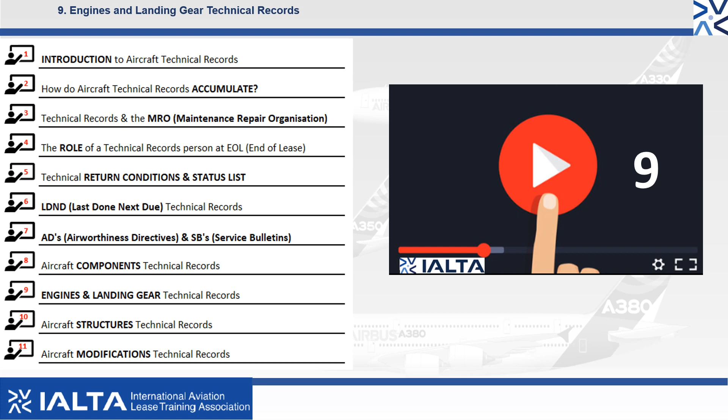This is video number 9 in our series of 11 videos introducing you to aircraft technical records. The aim of this video is to introduce you to the engines and landing gear technical records review at the end of lease.

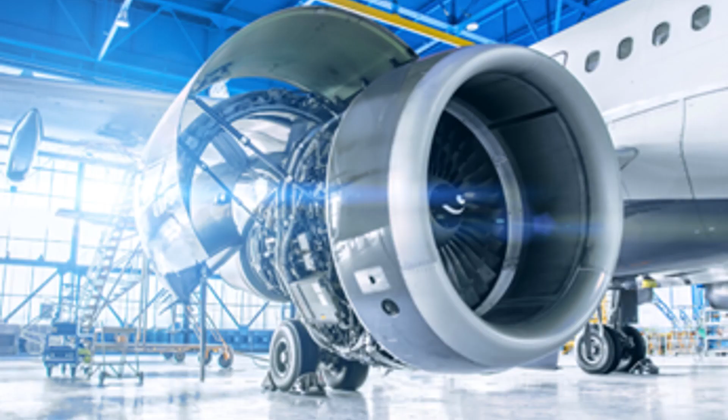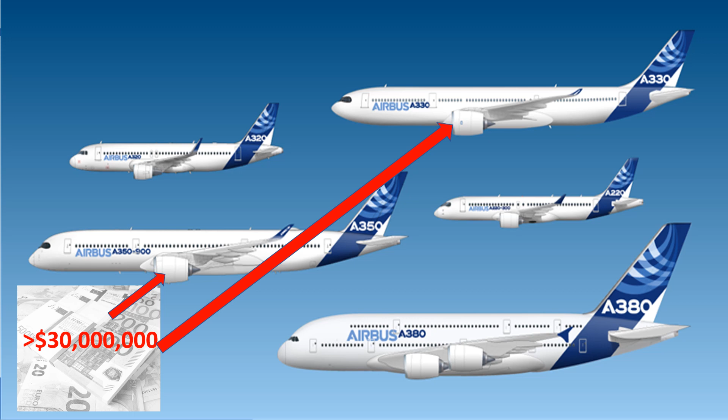When we look at the review of an aircraft engine, it is best to consider the engine as a standalone asset, and this is mainly due to the significant costs involved. For a wide-body aircraft like an Airbus A350 or Boeing 787, an engine could cost in excess of $30 million, and remember, there are 2 of them on the most common aircraft types. A typical narrow-body engine for a Boeing 737NG or Airbus A320 can cost in excess of $20 million.

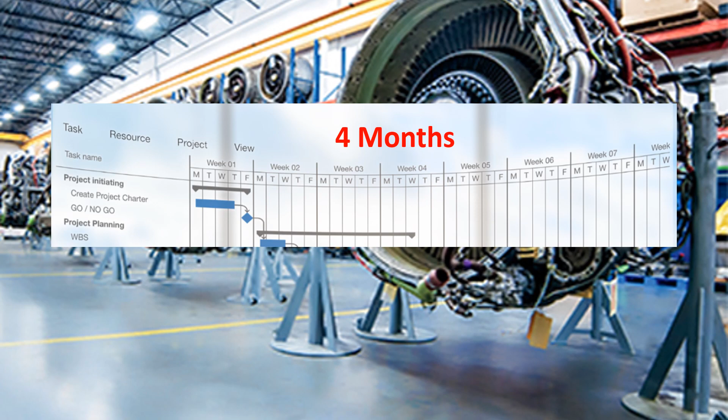What you might find interesting is that an engine has to be removed from the aircraft after a certain number of hours and cycles and sent for a shop visit, or SV. The overhaul in the engine shop can take up to 4 months, and the cost for a shop visit with full LLP replacement is in the region of $6 million. In order for the airline to keep the aircraft operational, it will often have to lease another engine.

Some common engine manufacturers include General Electric, Rolls-Royce, Pratt & Whitney, CFM International, and International Aero Engines. All engine technical records will identify the make and model of the engine, for example, CFM56-5B, and more importantly, will reference the unique engine serial number, or ESN.

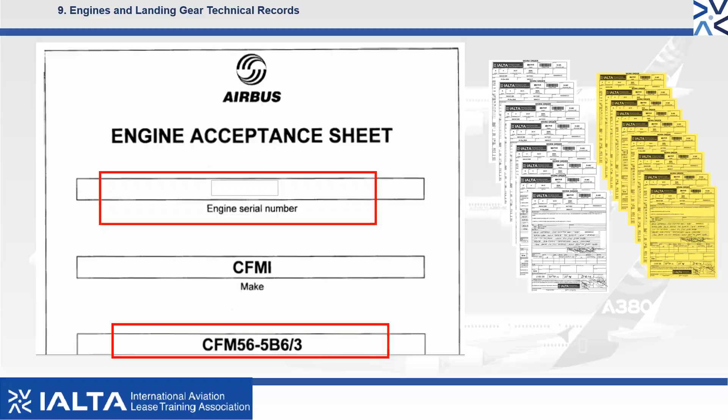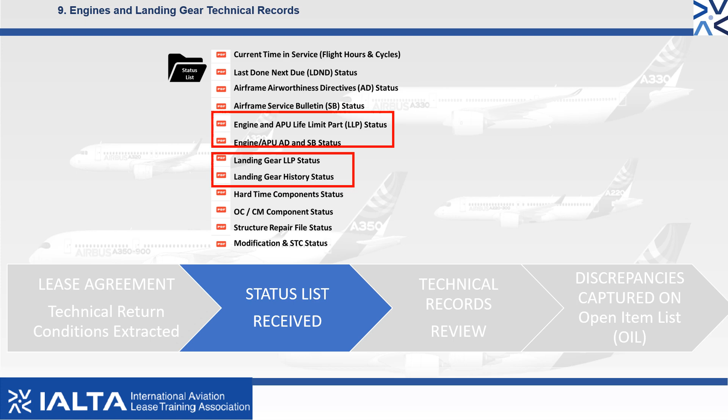Part of your role as the technical records consultant will be to review the engines, APU, and landing gear records from the redelivery airline. The high-level process involves extracting and becoming familiar with the relevant technical return conditions from the lease agreement. The starting point of the engines and landing gear review is when you receive the certified status list from the returning airline, reviewing the technical records to ensure that all documents are present.

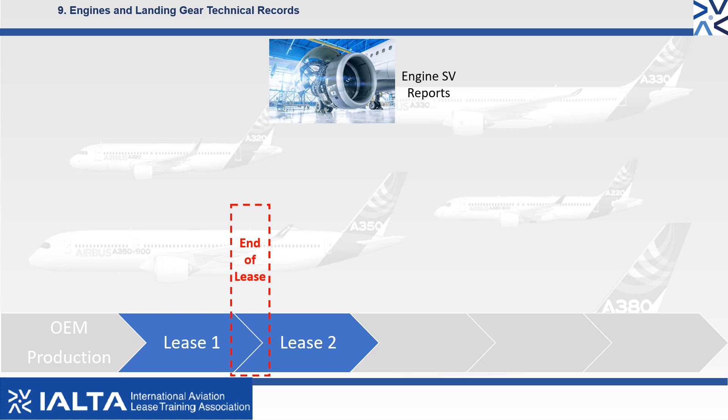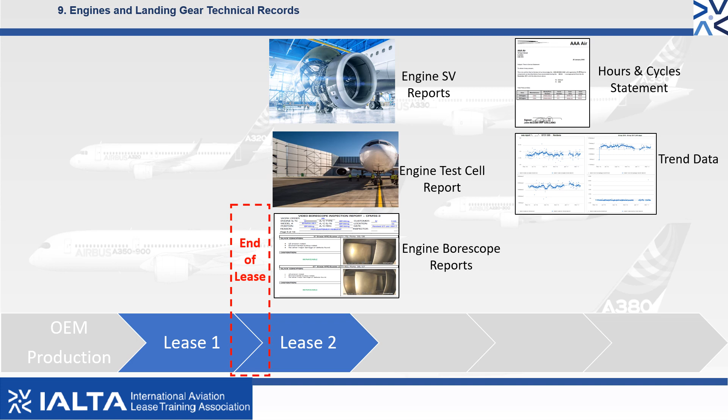Some additional technical documents associated with an engine review at the end of lease would include the shop visit reports, the test cell report after the overhaul, engine borescope reports, engine hours and cycle statement, engine trend data, and incident clearance statements, or ICS. Any issues or missing records are captured on the OIL and communicated with all stakeholders.

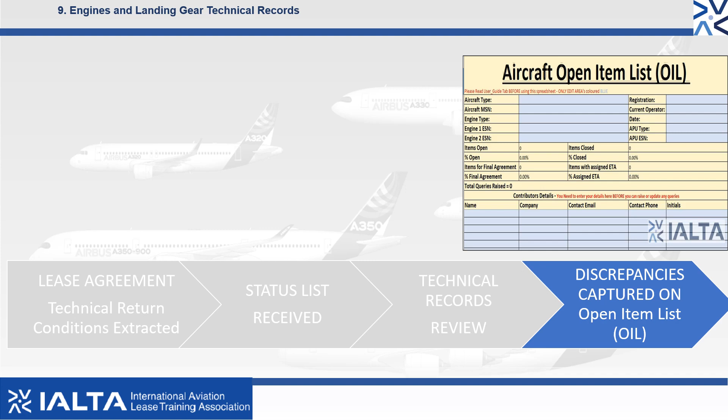We must also consider the engine's operating environment, as this greatly affects the performance and condition of the overall engine performance. An aircraft taking off from the UK in temperatures of 20 degrees Celsius will not have to work as hard as an engine taking off from Dubai in 40 degrees Celsius. The harsh environment operation means that the engine has to work harder and the internal wear on the engine parts is a lot greater.

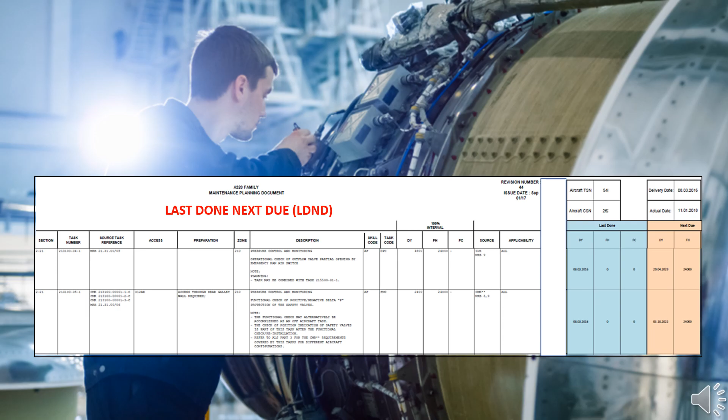As well as the shop visits, it is important to highlight that the engine will also require maintenance checks to be performed during operations by the airline, and these tasks can be reviewed on the last done, next due, or LDND, that we discussed in video 7. Engines will also have their own airworthiness directives and service bulletins, ADs and SBs, modifications and components also to be reviewed at the end of lease review.

For each line item on the certified status list for engines, we are checking for the dirty fingerprint, or DFP, of the certifier that performed the task and on what date. We are also checking for any associated paperwork arising from a defect and covered on a non-routine card, or NRC.

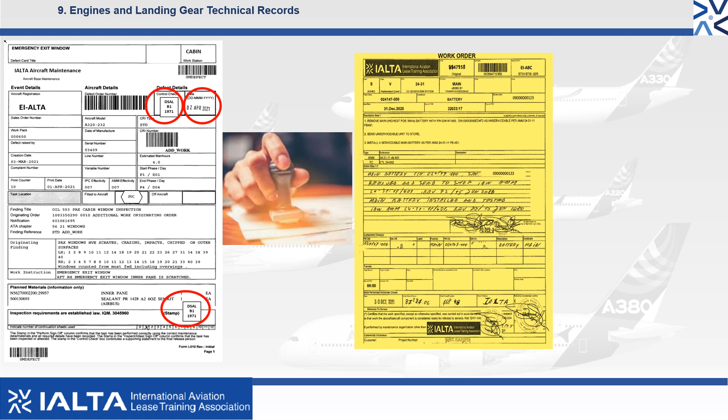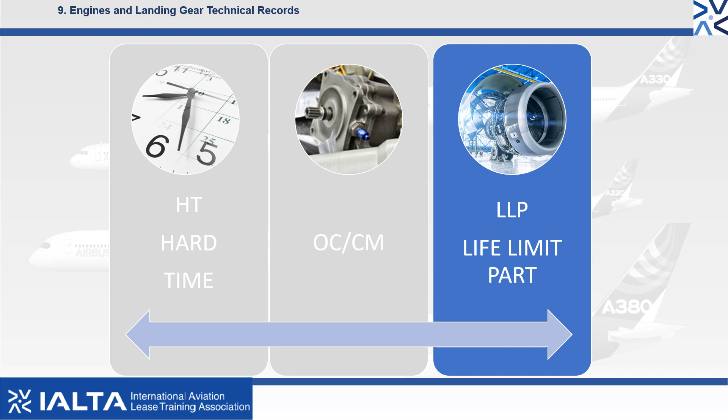In Video 8, we discussed life-limited parts, LLPs. The most extensive part of an engine technical records review is on life-limited parts. The engines contain multiple LLPs. These are parts that have a defined life that is measured in flight hours or flight cycles and must be replaced before the defined limit expires. When an LLP reaches its life limit, it must be removed and destroyed as it cannot be used further. The replacement of LLPs takes place during a shop visit overhaul.

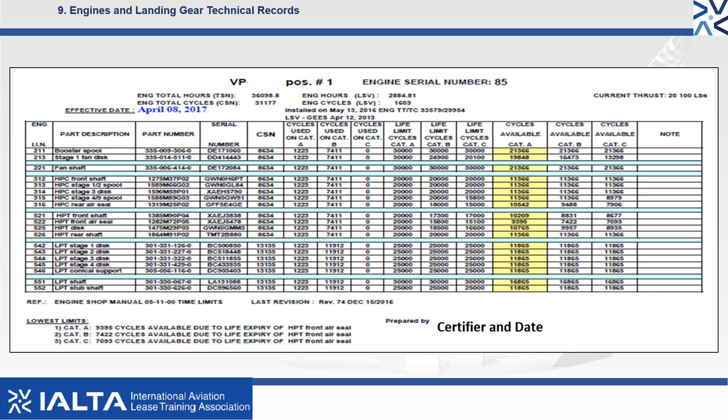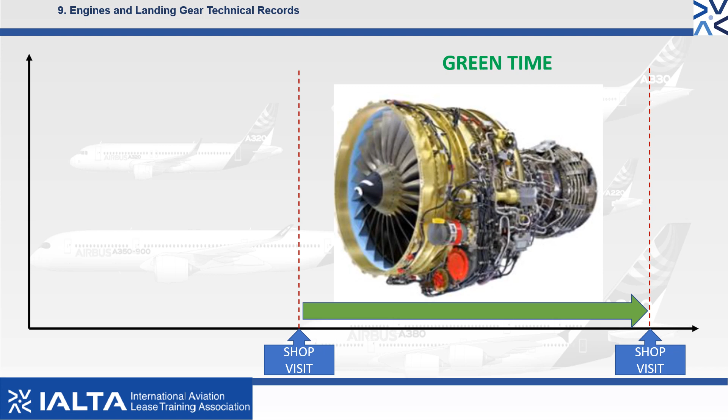The engine disk sheet lists the life-limited parts from the various sections of the engine: the fan, the compressor, the low pressure turbine or LPT, and the high pressure turbine, HPT. Our review of the disk sheet is to determine the LLP serviceability and remaining life. We can compare this data to the technical return conditions on the lease contract. Aircraft engine green time is a term used to refer to the amount of time the engine has remaining before its next major overhaul. Once the overhaul is completed, the engine is considered to be at zero time.

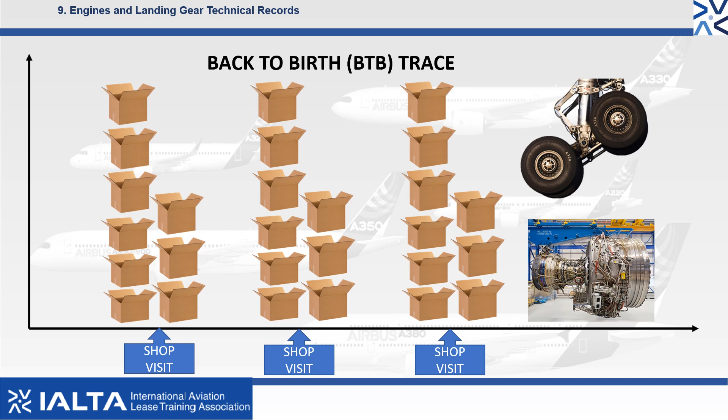Back to birth trace is a term used in the review of engines and landing gear technical records to describe the complete history of the engine from the date it was manufactured until its current status. This trace includes all the maintenance and repairs performed on the engine or landing gear throughout its life, as well as any removals, replacements, and inspections.

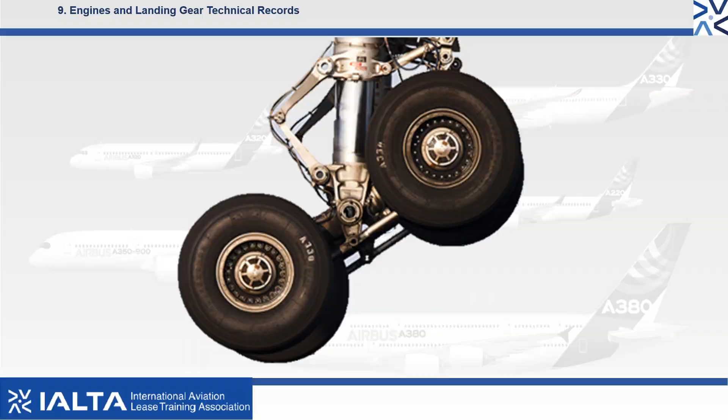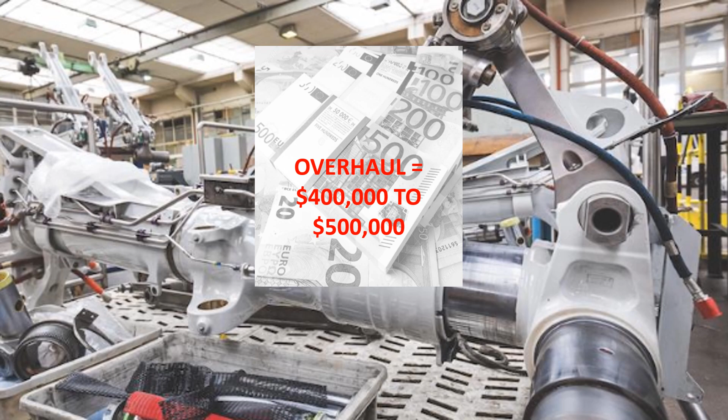The landing gear is another complex area to review because the entire landing gear assembly has its own maintenance requirements as defined by the manufacturer and commonly contains some life-limited parts, or LLPs. Like engines, landing gear must be removed for shop visits, and often airlines will use serviceable exchange gears to meet the technical return conditions when handing the aircraft back to the lessor. A narrow-body landing gear can cost up to $2 million and between $400,000 to $500,000 to overhaul. Prior to a gear going to the overhaul shop, the rotable parts are removed, such as wheels and brakes.

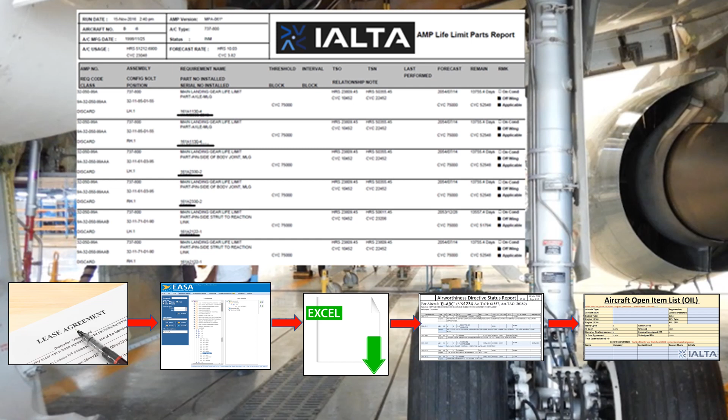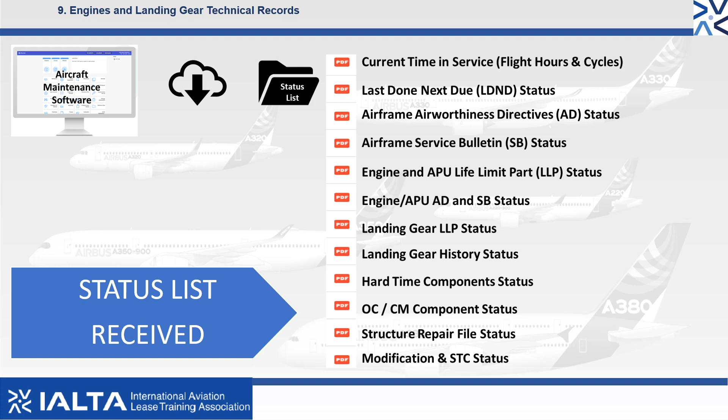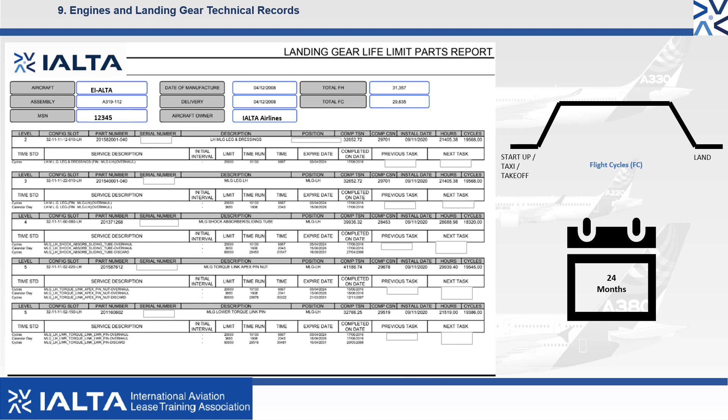Similar to engines, the landing gear will have its own related ADs, SBs, and modifications. The landing gear's list of LLPs appears on the Airline Certified Landing Gear Status Sheet. As you can see, the landing gear LLPs are driven by aircraft cycles and time, or date. Typical landing gear return conditions could have a minimum of 4,500 cycles or 24 months, whichever is the limiting factor, of life remaining to the next expected removal for overhaul.

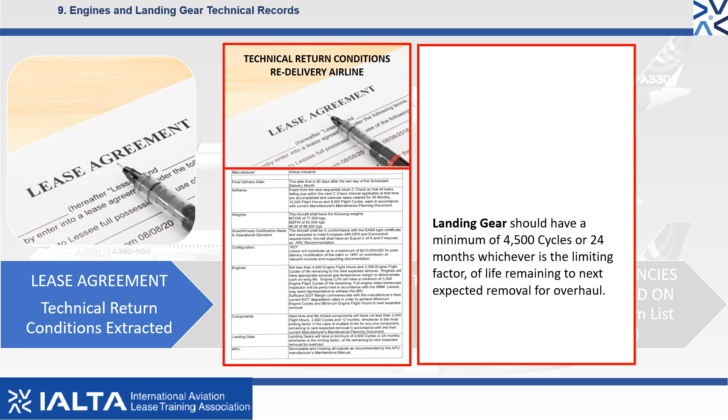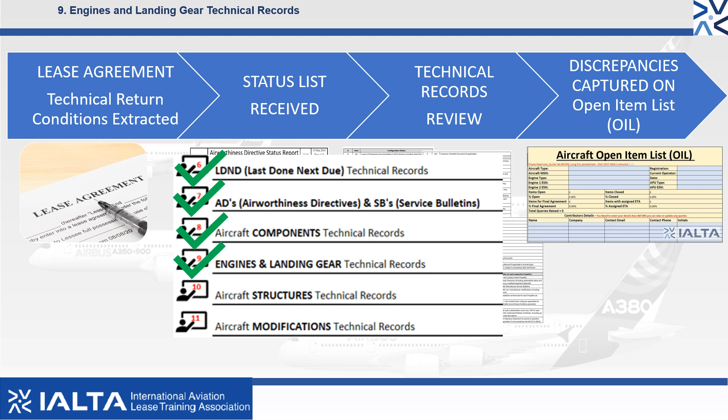Congratulations on completing this introduction video on engine and landing gear technical records. In the next video, we will discuss the technical records associated with aircraft structures.